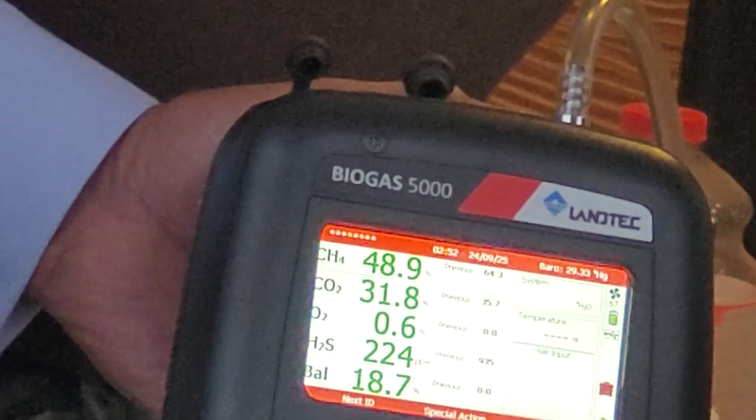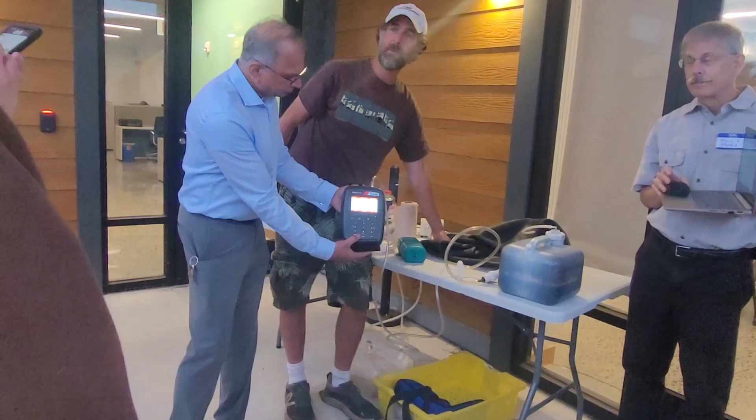So biogas, burnable gas, as you can see, is somewhere around 50 to 60% methane, and it'll burn. What we want for our engine is around 60% methane to run a good tune. Our engine will run down to 50%, but it starts to get less happy at that point.

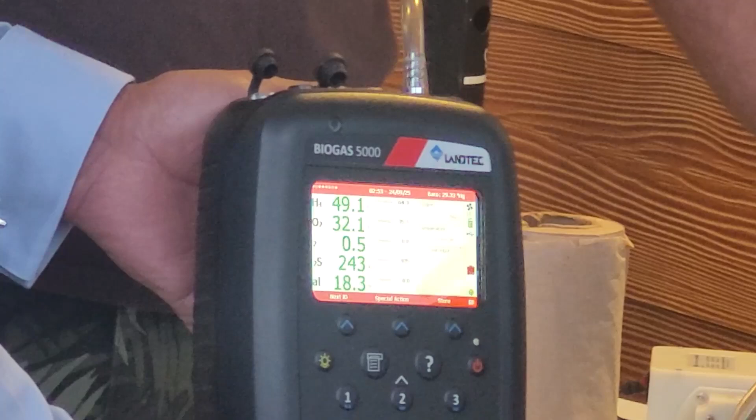All right. Well, hydrogen sulfide's been steady at around 18. You want that higher? Or is that balance gas, actually? So we're leaking a little bit of air in here somewhere. I have kind of an imperfect farm rig system. Not much air is leaking in. There's only 0.5% oxygen. Okay.

Is there any way to scrub out the CO2? Yeah. I'll take that back. Okay. Thanks for your help. That was great. Looks like that's about where we're at.

Biogas is somewhere around 30 to 40% CO2, and if you want to scrub it out, then you're going to be making what's called RNG, renewable natural gas. On much larger projects, they scrub out the carbon dioxide, get up to like 95% or higher methane, and then if you have a high enough purity methane, you can inject it into the pipeline as natural gas.

There's a couple different technologies to do that. Most of them are quite expensive. Typically, it's like $1 million to scrub the carbon dioxide out of the biogas. So that's going to be a much larger farm, like a 10,000 cow dairy, or there's a big one now going into Western Pennsylvania where they have like 10 farms contributing their manure to one place for a big digester. They scrub out the carbon dioxide and they're injecting that into the pipeline.

RNG is much more valuable than biogas because we can sell it to California where they have these renewable fuel standards that are more aggressive than here in Pennsylvania. Or you could possibly virtually sell it to another company that needs sustainable fuel.

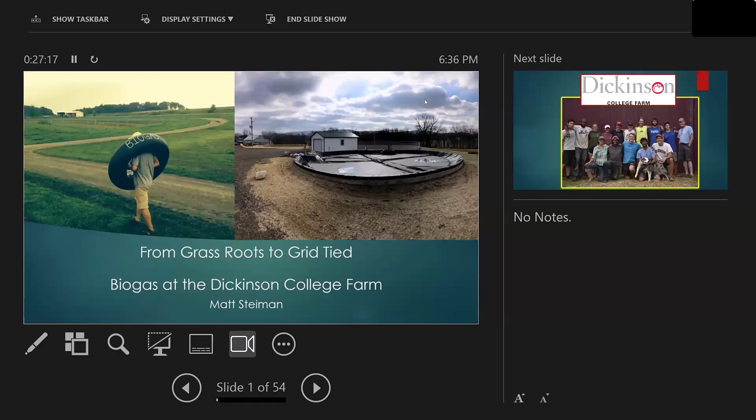Okay. We talked a little bit outside. I want to show you some pictures of our project because I think pictures are worth a lot. And then continue to take questions, so don't be afraid to fire them off as we go. Thank you, Phil. All right. So we start off with the inner tubes, like you saw there. There's our big digester on the other side.

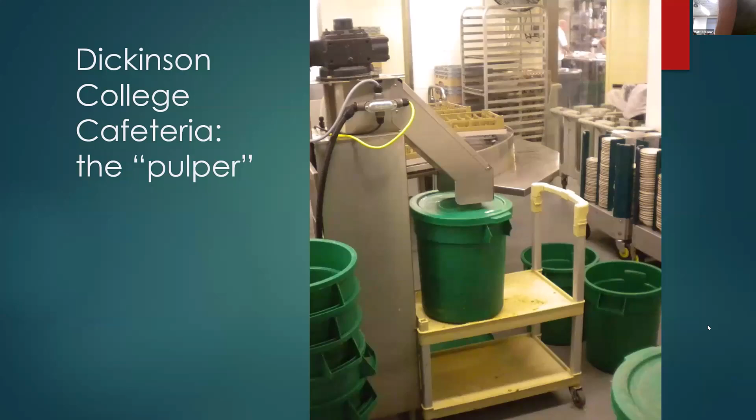So we have been in food waste for a long time. We collect food waste from the cafeteria. It used to be all for compost. Every day we bring in about 1,000 pounds of food waste for composting. We have a pulper in the cafeteria there, so all the kitchen scraps, as well as the post-consumer food, go through our pulper and then come out to the farm. Since 2008, we've collected about 3.5 million pounds of food waste for processing on the farm into compost. We started experimenting with biogas from that about 2015.

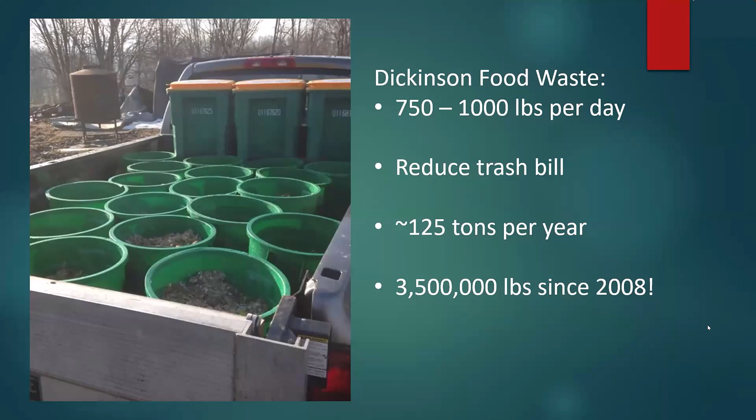We have oxygen there. The microbes are converting the food waste and the leaves that we put into our compost. They are digesting them and releasing some of the energy that was in those materials as heat. If we have a lot of microbes in one place, we get a lot of heat. We can raise our compost piles to a nice, happy 150 degrees Fahrenheit. If we don't have air in the system, we get what's called anaerobic digestion. And if we have the right microbes, we can go all the way to methane.

So the microbes that are in cow manure or sheep manure, there's some in our human guts as well, and other ones on the planet, can be used to digest organic materials into biogas and simpler compounds. We start off with complicated things like a stick of spaghetti, some carbohydrates, proteins, fats, and we break them down into simpler organic molecules. In that process, we release biogas, which is carbon dioxide and methane, and a little bit of hydrogen sulfide. The gas is burnable, as you saw outside. We can use that as an energy source.

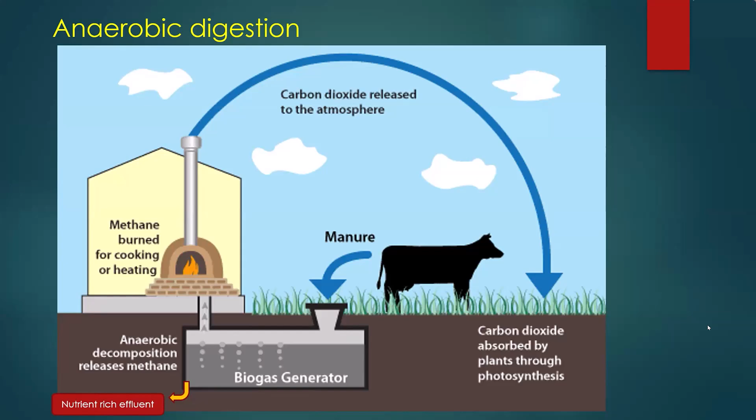One other thing is the liquid coming out of the system after it's been digested is a great fertilizer for crops, because biogas is carbon dioxide, methane, hydrogen sulfide. All the good plant nutrients, nitrogen, phosphorus, and potassium, are coming out of the digester in the liquid, and that can be used for crop fertilizer. So nothing's really lost.

CO2 from their food is considered atmospheric because it's sucking back in. So when the feedstock is not an annual plant, would you consider it maybe not cycling? Like the timber industry and trees, that would not necessarily be considered atmospheric. Great question. Maybe annual crops, at least, I don't know. It's just a new concept to me. Yeah, I think I would agree. Well, because fossil fuels would be a different time frame too, so that's where my mind is going, like, where do we stop?

So, okay. Good question. I just haven't thought of it before. There's a standard. If I could channel Dr. Richard, who's not here today, I would say photosynthesis is a very powerful consumer of carbon dioxide. Like we can actually see, or scientists can see, the decline in atmospheric carbon that's seasonal every year because of the photosynthetic drive. But that's a big picture question that I can't really answer in terms of the sustainability.

Well, when fossil fuels were being made, the carbon dioxide content in the air was very high. Good point. Yeah. Again, we're getting a little outside of expertise, so if I can move on. Great. All right. Thanks. I have a few benefits up there.

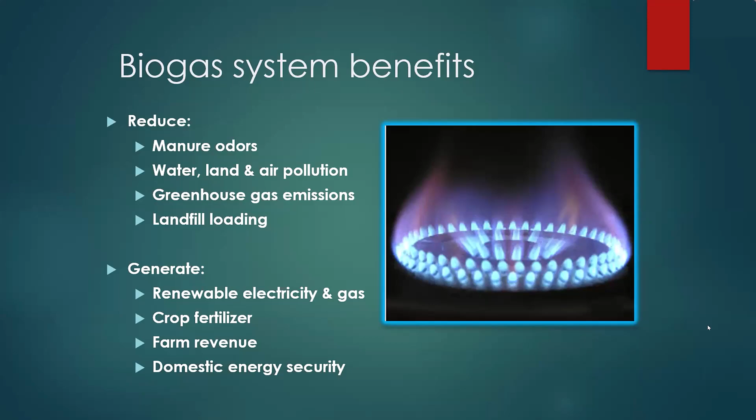We can generate energy, right? Gas or electricity, crop fertilizer, farm revenue, and domestic energy security. All right, and it's fun, right? I love making biogas. We do it with kids. It's not complicated. You don't have to be an engineer to make biogas, right? We have a bunch of these little digesters.

So there's the batch digester like we saw outside, and this is a type of a continuous feed digester. We've got a loading on one end and an evacuation port on the other end, like a drain. If I feed a little bit here, imagine if there was a water line going through there, right about here. That snorkel will allow, say I put in half a gallon here, it's gonna push out half a gallon of effluent on the other side.

And so every day I can feed it a quart of material, what have you. It's gonna push out a quart of effluent, give it a little stir, and that's a living system. It's feeding, it's eating and it's pooping every day. And it's going to be pushing out some gas. All right.

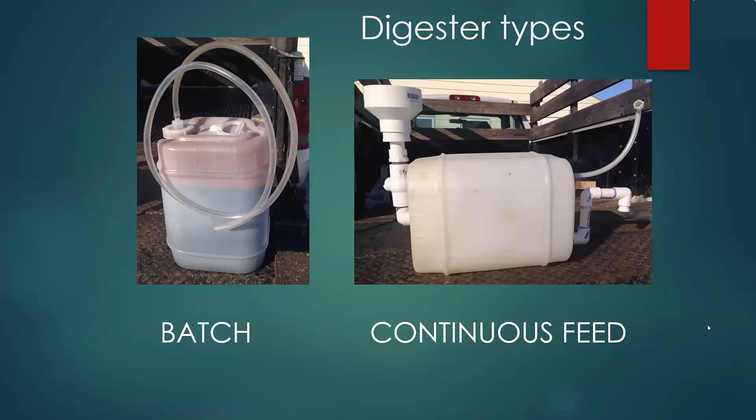Yeah, good question. Residence time. We want a residence time of, standard for mesophilic temperatures, which is cow body temperature, around 100 Fahrenheit, about 30 days. So we want our stuff to live in there for about 30 days. And so you would divide the volume by 30 and feed it that volume per day. Great question. Okay, here's an example of some of our lab stuff, early designs, testing different substrates. Again, there you see the slurry going in one end, coming out the other.

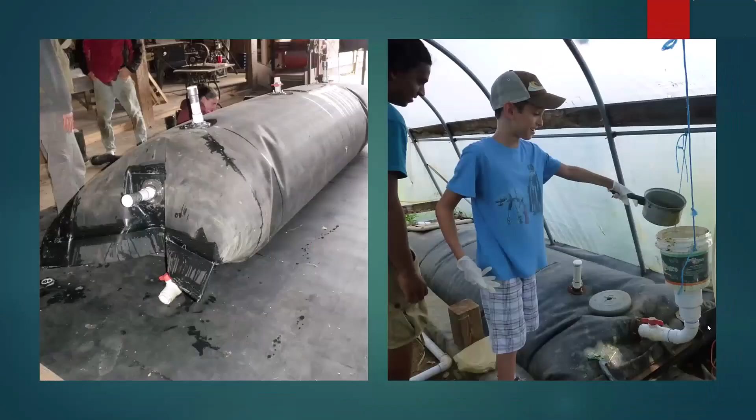All right. Are you guys okay with these images in the bright light? You want dim light?

The food waste that you're putting in there, you're obviously grinding it up? Yeah. Okay, so you're really pouring sort of a slurry of food in there, right? So it's a liquid. Thanks, Ron. Yeah, it's a slurry. Because we're flowing through, in these cases, 1-inch pipes, 2-inch pipes, what have you, we want it to be pretty thin. Bigger digesters, maybe, I've heard of people putting whole pumpkins in, but I would rather chop it up. And the pumps that we use are high solids pumps. We have grinder pumps and chopper mixers and stuff like that to keep everything moving.

On a home digester like this, my friends have in their yard an extra garbage disposal. Yeah, a sink. They put all their melon rinds and stuff through that garbage disposal, catch it in a bucket and keep the digester out there. Great question. This one we built, it's an EPDM roofing membrane. We glued it up into a burrito. That's our first bag digester. This one, those of you who have been at the Energy Festival a long time probably met Biogas Bob.

Biogas Bob was my mentor in biogas systems, and he designed this one. This is called Athena. It's Biogas Bob's Athena, and we built that in 2015 at our farm with Bob. Sadly, Bob passed away in 2020, but his legacy lives on at our farm, and we miss him quite a bit. So this is our bigger one that we built there.

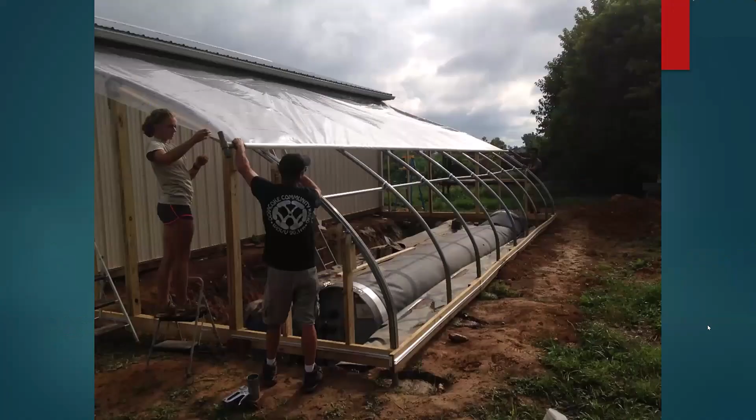This one, put it in a greenhouse, keep it warm. So again, we want to keep things around cow body temperature, 100 Fahrenheit approximately. They work a lot better at that temperature. Here we are loading it with a little gravity feed stand there. And the design of that one looks like this. We've got a loading tank, put in like 100 gallons at a time. We fed that 2 to 3 times per week.

We've got about 1,000 gallons of seeder liquid. And then when we put in 100 gallons over here, it's going to push out 100 gallons of digestate or effluent the other side. And the gas bubbles up to the top. We send that to our storage tank.

Did you build insulation under it? We did. Yeah, we insulated the ground. We even put heat pipes under it. It didn't work. So mostly it's like a 2.5 season digester. It didn't work because of that plumbing, but it could work on your project.

Things like this, greenhouse projects, watch out for rats. We had one fail from mice or rats getting under it in a warm space, chewing on the rubber, infesting, things like that. So mice and rats like warm places where they can hide.

Is that just one chamber? Yeah. So you're continuously removing feedstock as well. You got it. We're moving effluent. No, but there's some feedstock in the effluent that hasn't been changed, right? Yeah, absolutely. Is there not some way of? There's no baffle in that. Yep. So this is called a plug flow.

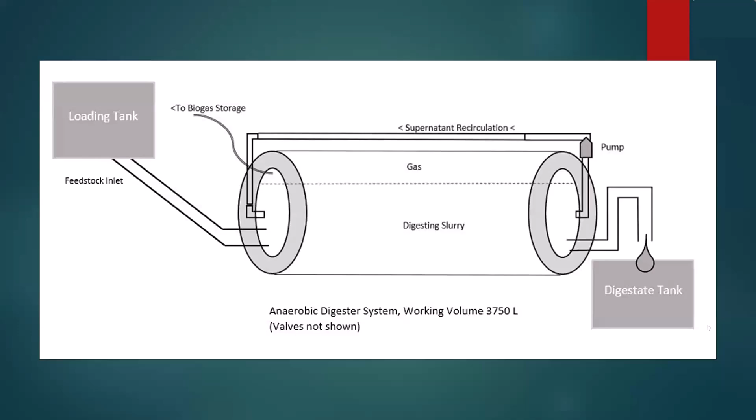We realized a couple years in, boy, we collect 1,000 pounds per day of food waste. And that digester you've been seeing in those pictures only eats like 50 pounds twice a week. So we were making all this biogas with a small amount of food waste, and we realized we have all this food waste. Can we turn that into some other kind of energy that we can use? That's how we got to biogas to power, because we can't really bottle up and sell biogas. We can only cook so much. We can beg people to cook more, but at some point you have too much gas.

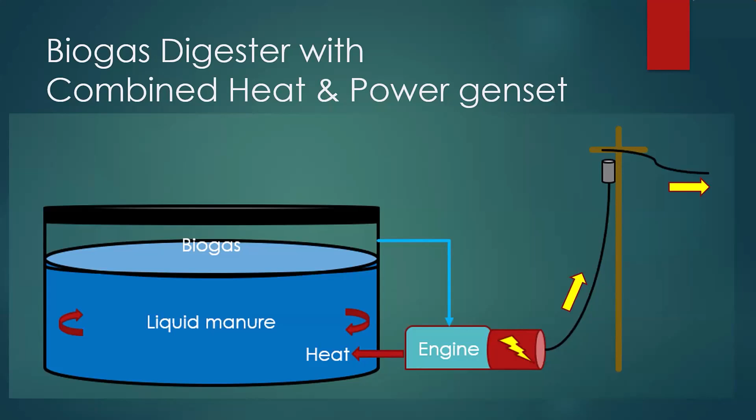That's an engine and a rotating generator. Right, yep, it's a generator. Or shaft energy from the engine that turns the generator. Yep, exactly. And it's a CHP, combined heat and power, so it's meant to collect the heat as well as electricity.

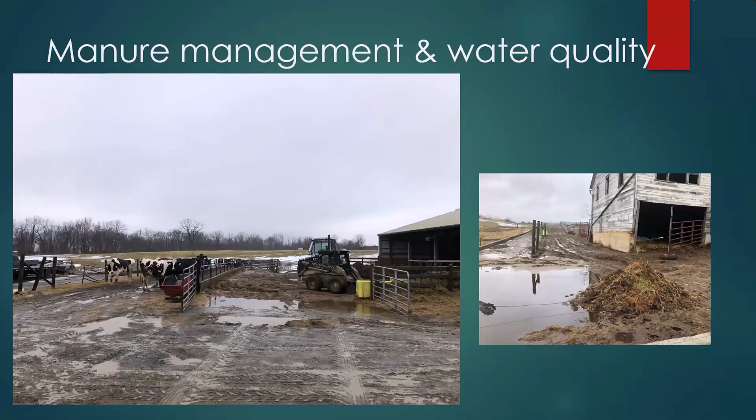We're working with a dairy farm that had manure management problems. Manure going to the stream is bad, especially in the Chesapeake Bay watershed, so we got a lot of funding to help clean up that manure problem and build our project. We also have a lot of food waste. This is brewery waste from a local brewery, bakery waste, food bank discards, farmers market waste. Right now we're at about a ton per day. Also apple waste. This is a lab where we test all that stuff. We can check the energy output of different substrates. And so I talked about floating cylinders earlier.

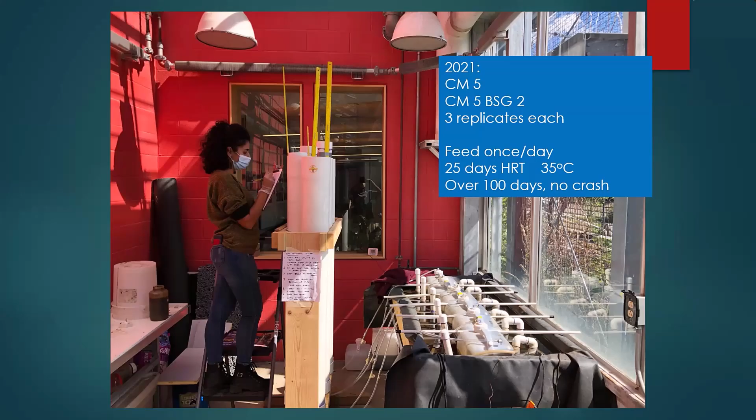These are the little floating cylinders. We put a meter stick on there. We can measure daily production of gas, compare different things. So my master's research was on brewer's spent grain with cow manure as a substrate. And we want to know, with this brewer's grain, how many cubic meters of biogas can we generate per kilogram of fresh brewer's grain, right? And I got a number, right? That's from 2 years of work.

That number, we can punch that into the system and figure out, okay, with all this stuff we're going to bring in, how many pounds or kilograms of stuff are we bringing into the project? This is the amount of biogas we expect to generate per hour. About 25 cubic meters per hour, which is what I need to run the engine that we have for the project. So this is kind of the background calculations when we're designing our project. Like how much waste do we have? What kind of engine can we power this project?

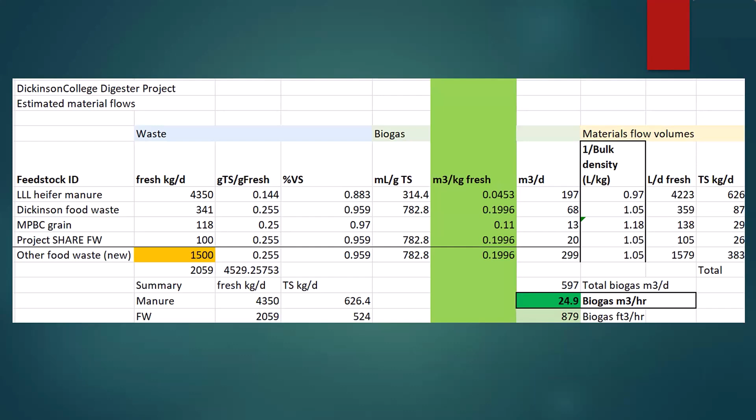Yeah, that won't be on the quiz.

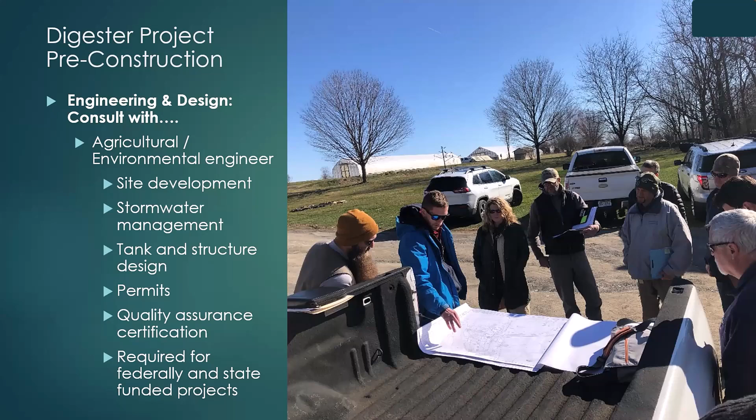When you build a project of the farm scale, there's a lot more permitting and design and fundraising that goes into it than these owner-built projects like you saw previously. So we started this project. Dr. Epstein was my professor in 2018 and did a design project with other students. That was our feasibility study in 2018. 2020, we started fundraising, permitting, engineering. 2024, we're almost done. Okay, we've commissioned the project. We're almost done commissioning. So it's been a really long, hard slog. Engineer, township manager, fire marshal, all those guys are there, right?

There's a lot of funding out there. And I don't want to bore you with details, but if you want details on where you get the funding for these projects, contact me offline and we'll go over that. Our project is costing about $2 million. And we have a lot of money from ag funding as well as US EPA and Sustainable Energy Fund, Berks County Community Foundation, and other local foundations, et cetera. So we did quite a funding package to pull it all together. Dickinson College has put in about $700,000 so far, and Larry and James are helping us get some of that back. So thank you.

Okay, lots of engineering. What are we doing on time, fellas? 7. You got 2 minutes.

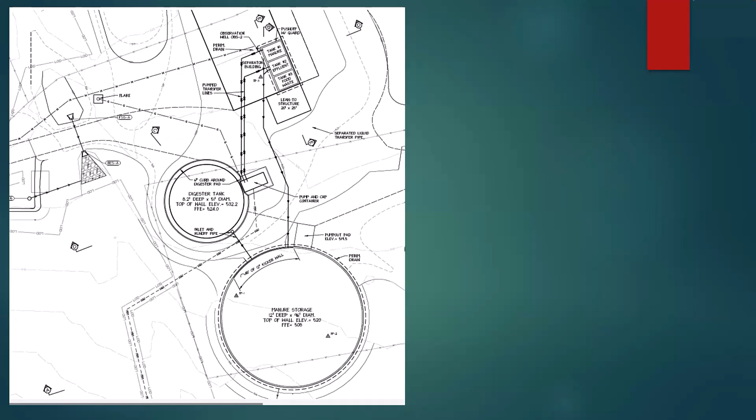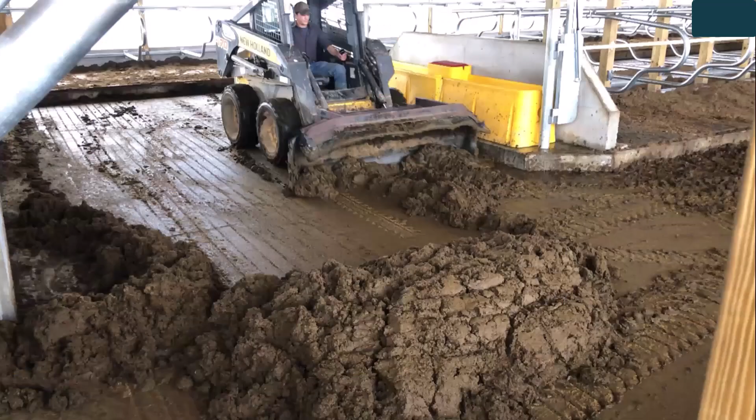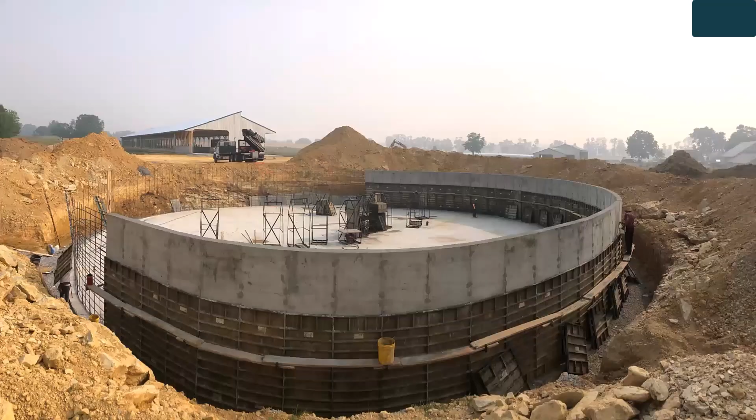Okay, all right. Here it looks like construction on the fly. So big tanks for food waste. We built a barn for the cows. Cows are in the barn now. We push the cow manure like that with a machine down into a pit. There's my neighbor, her dairy cows. That's the cow manure pit. And we built these big round tanks. Yeah, that's a 600,000 gallon effluent tank. Here's my students' biodigester being built. There's some graffiti. We insulated the tank when it went in the ground.

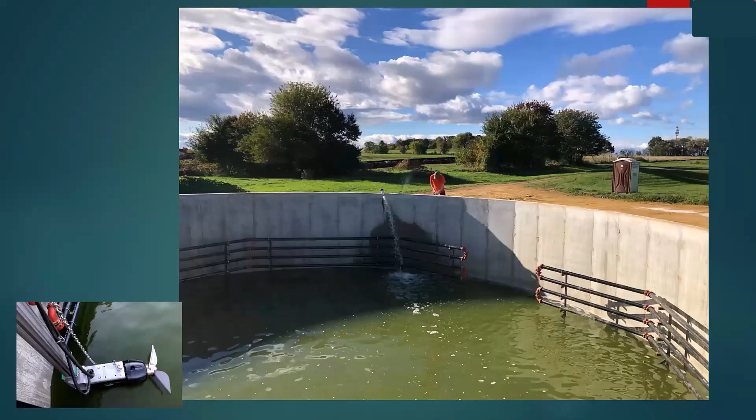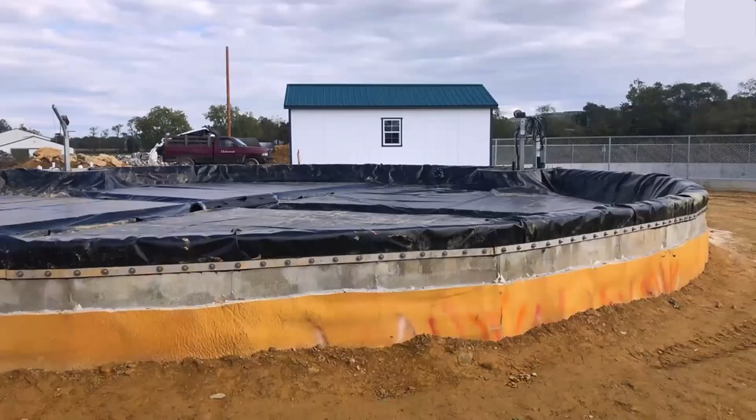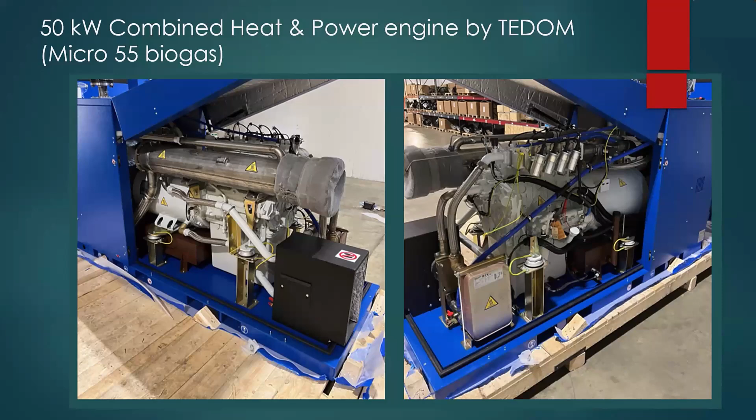This is 115,000 gallons. There's the heat pipes in the digester to distribute the heat of the engine, circulating hot water there. And then there's the digester full of liquid now. It's got 115,000 gallons of liquid in there. That's a gas pipe going around the surface. There's a rubber cover on top of that to catch the gas. It's all bolted down and caulked around the sides. That's the power shed in the back there, where the gas goes right into the power shed to run this engine. This is our 50 kW CHP engine from Czech Republic. And pretty awesome. Made to run on biogas, very sophisticated.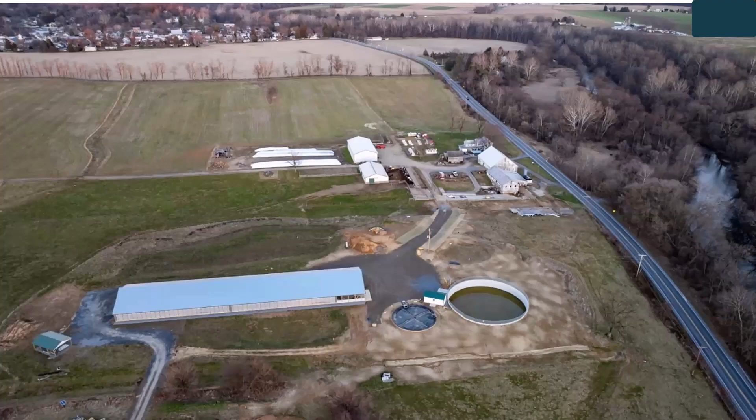Here's what it looks like from the sky. So we got the barn, digester, manure pit. And then this is our compost area right next door, where we put the digestate. And there we are next to the dairy farm with the creek right across the street there. So that's why we were able to get some nice ag funding, the dairy was leaking manure to the stream. Now we've contained that manure and we can land apply it when we need it. All right. Yeah, we talked about that already.

We do a lot of youth education. So we have a lot of little kids and adult kids come see the project. Part of our mission. We got a nice YouTube video series. If you like YouTube videos, check us out. Dickinson College Farm Biogas on YouTube. And that's it. All right.

All right. I appreciate all your questions. I hope I answered most of them. And I hope you got excited. If you want to know anything about biogas, want to come see our project, please do. We do take visitors by appointment, and it's a lot to see. If anybody you know wants to do one of these, have them contact me, please.